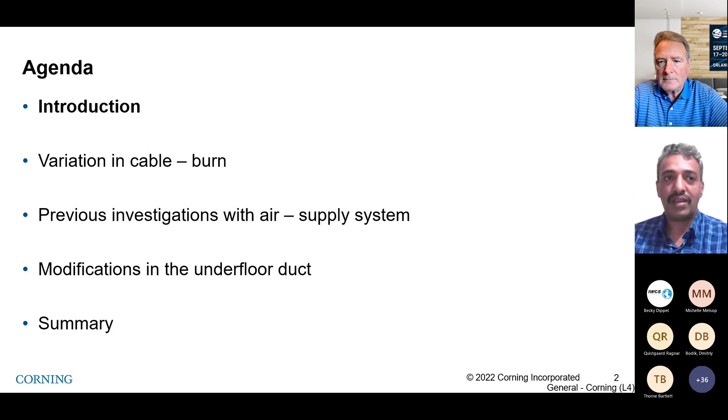The regulations provide common technical language to assess performance of construction products. It ensures reliable information is available to customers on the performance of the products so that customers can make informed choices when they buy these products. So the idea of CPR is to provide reliable information to customers so that they can make informed choices.

One of the very important pieces of information that people need to know before they can buy construction products is the fire survivability of the products. And this particular test is about fire survivability of cables when they are installed in the construction environment. So all the cables which need permanent installation in the EU region must be classified as part of this test.

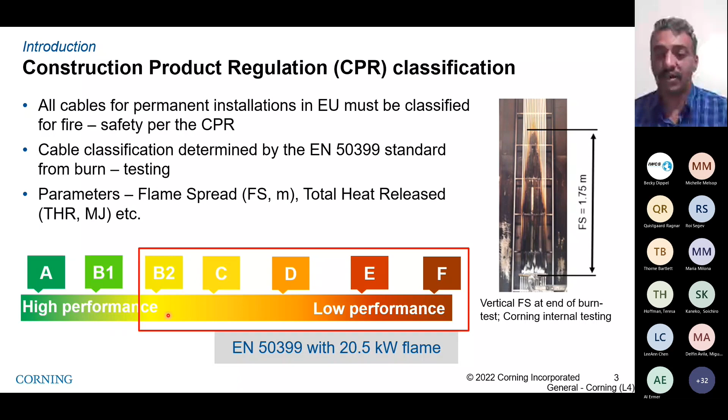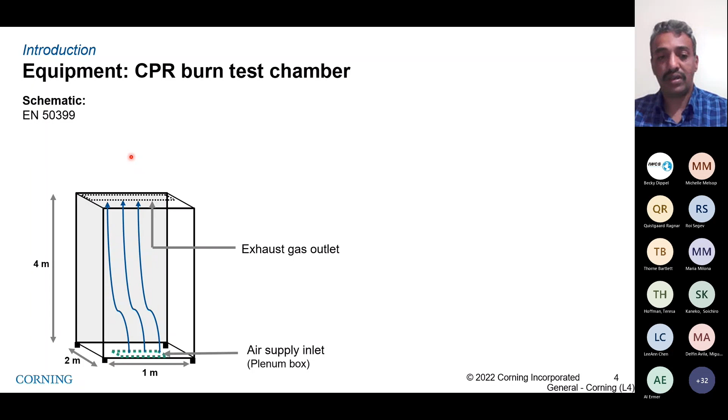So here I have a small schematic. It doesn't show all the details of the test chamber used for testing cable burn performance, but it shows the key features. We have a sort of quadrilateral shaped test chamber, and it has two openings - one inlet on the bottom side for air to come in, and one outlet on the top side through which the combustion products can go out from this chamber.

All the combustion products that go out from the test chamber are collected and sampled. In this sampling tube, this is where they measure the heat release rate, smoke production rate, and all of the key parameters.

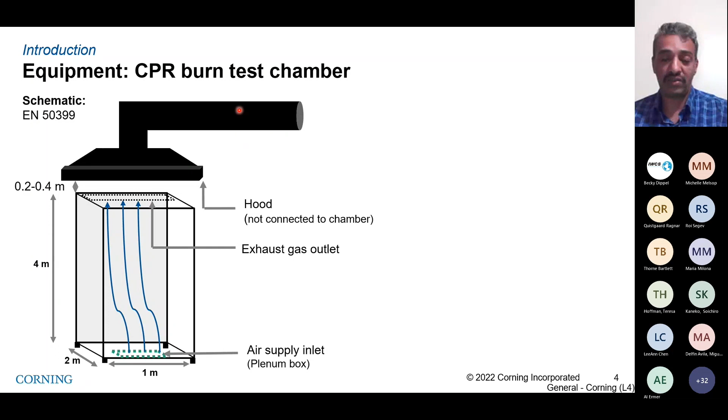The cables are typically mounted on a metallic ladder. It is usually made up of steel, and depending on the size of the cable, they are either bunched together in a few numbers, or mounted one single adjoining to each other.

The test itself starts with starting the flame, the burner. Fire is provided by the burner, placed somewhere here, and this burner creates a flat flame which impinges on these cables. Once you initiate the fire, it is supposed to propagate along the cable length vertically upwards. Based on the cable's performance, it will propagate a large distance or a small distance, and that will decide the classification of the cable.

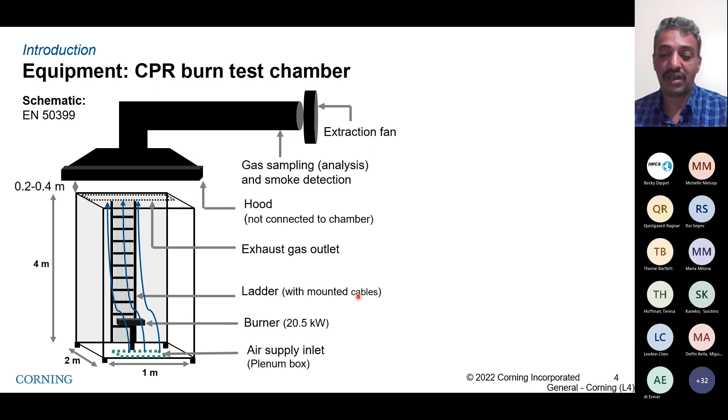So in this particular work, we are more focused on the air supply that comes out from the bottom, from the floor of the test chamber. This outlet is connected to a set of tubings which supply the compressed air through these tubing systems, and then at the end of this, it comes inside the chamber.

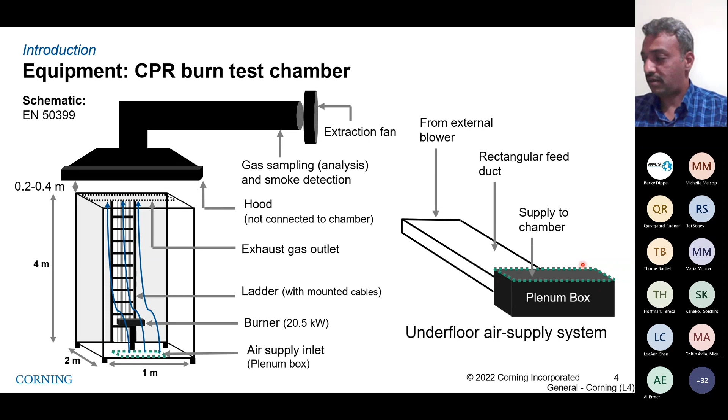Now I'm going to talk a bit about why we are testing, why we are studying this particular test. The topic of the next part is variation in cable burn performance. This is the main problem we are trying to solve. There are various labs across Europe which do this test and can give classification to the cables, and manufacturers are supposed to reach out to these labs for getting their cables classified. We also in-house have a lab, a burn test chamber in Berlin.

What we have found is that the test results are not reproducible across the labs. So if you do this particular test in one lab multiple times, you will get similar results. But if you do this test across many labs, then the results are not similar.

So the test is reproducible at one lab, but not replicated across the other labs. So that is the main problem.

And we wanted to see the difference between each of these labs - what is the difference in the test procedures that they adopt, or what is the difference between the test chambers that they have. So to do that, Corning, as one of the leading optical fiber and cable manufacturers,

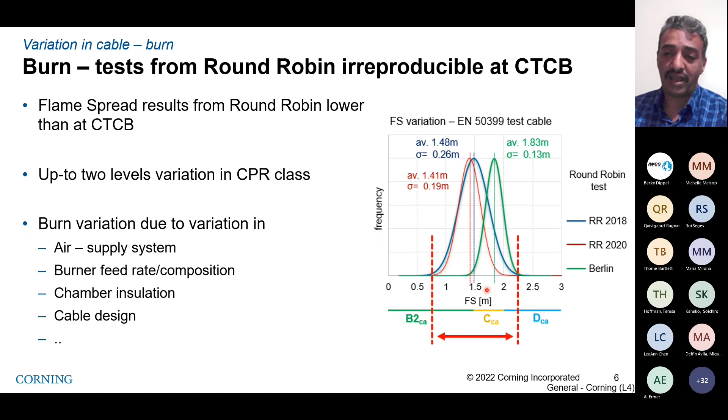So there were a lot of studies done in the past. I'm not going to go in detail of all of those studies, but you can find a lot of that information available on previous IWCS presentations.

So I briefly talked about the reference cable that Corning took an initiative to build. This particular reference cable has a flame retarding jacket material on the outside, a PE element in the center of it, and then the GRP element, strengthening element at the core of it.

So this particular cable was provided to all the labs across Europe to test. And then it was easier to compare because we had provided the same cable across the labs.

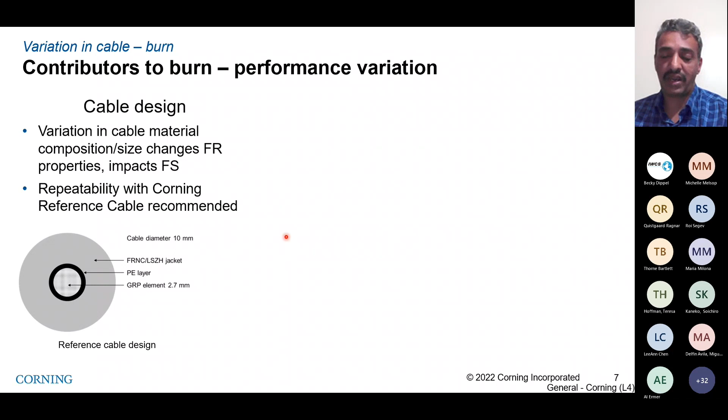I mentioned about the previous studies that were done, and one of those studies was related to burner feed rate. The burner feed rate study was done to verify the input, verify that the fuel input can be accurately measured by the devices that we have installed on the test chamber. So it was very consistently verified across a very long duration of time.

As part of this round robin study, we also found that it was difficult to test the flame or compare the flames that are produced by each of these burners. So a wooden blackboard was used to compare the flame structure across these labs, the flames produced by each of these labs,

and then based on the outcome of this whole study, it was decided that anything that falls within this region is acceptable, and there was a wide range of flames that were accepted, and certain criteria were devised about the flame. And we want to do something similar for the air supply system as well.

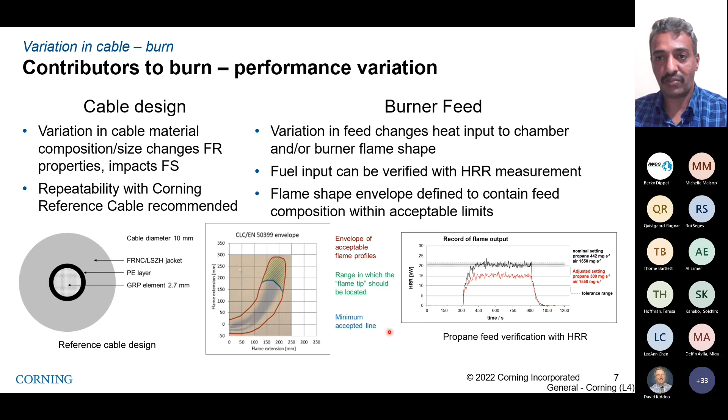I'm now going to talk about one of the previous studies that was done on air supply system. In the 68th IWCS conference, me along with some of my colleagues presented a study on a hypothetical scenario where we

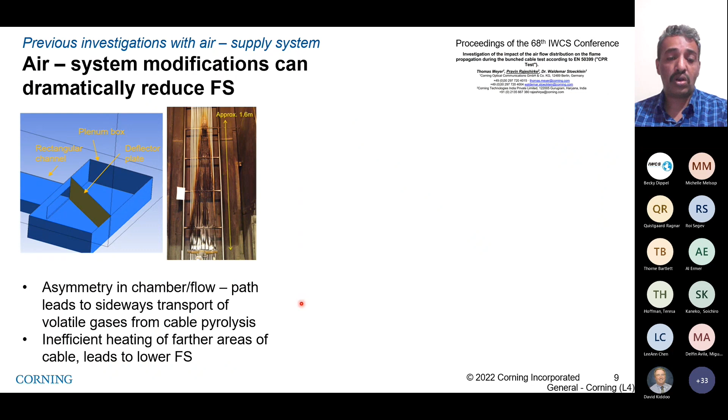modified the air supply system by putting in a kind of deflector shown here, and this created asymmetric flow, asymmetric air supply inside the system. At the end of this study, we found that this asymmetric flow pattern leads to lower flame spread. This led us to further explore this air supply system to understand exactly how that impacts the flame spread.

Then in the later studies, what we did is we closed half the portion of the plenum, or the plenum box.

In one experiment, we covered the plenum towards the door side, and in another experiment, towards the cable side. What we found is that when we covered the plenum towards the door side, the flame spread was drastically reduced from 1.9 meters down to 1.6 meters. This is large enough to make changes in the classification of the cable, so this was a significant impact.

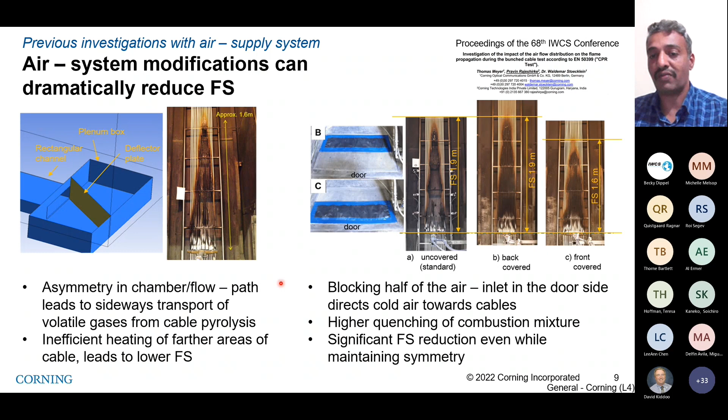Both of these changes were very easy to spot if you look at the chamber. So if someone modifies the chamber according to these suggestions, it was easier to spot and anyone could figure it out. This gave us more understanding that there may be other things hidden inside the plenum box which create similar flow patterns, and at the end of the experiments we might end up getting smaller flame spread. But we wouldn't know that the reason for smaller flame spread is the air supply system and not the cable design itself, which is what we really want to test. So that was the motivation.

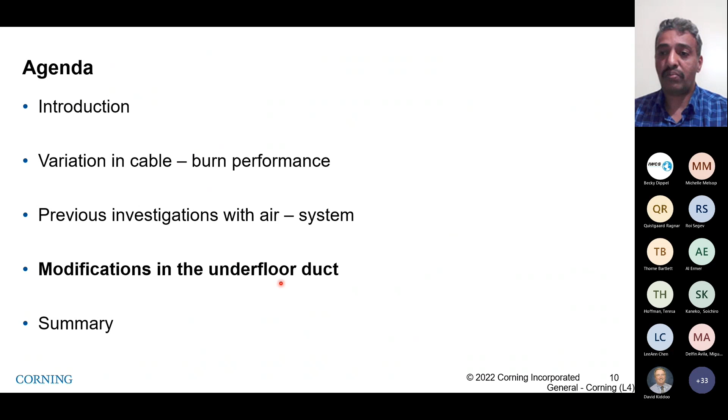So we looked at if we do changes inside the supply lines and make an airflow pattern similar to what we saw in the previous slide, we might end up getting reduced flame spread. That was the main motivation, to see if things modified here can result in lower flame spread. The rationale behind this test is to check the design of the cables for reducing the flame spread rate - it should not be impacted by the test chamber design. So this is one of the things we wanted to study.

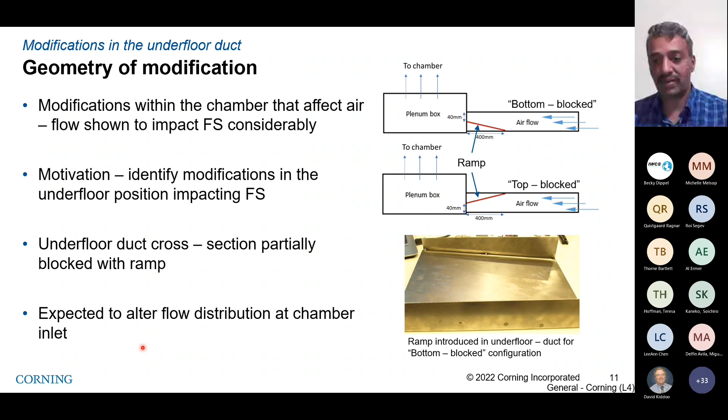Then we identified these modifications in the underfloor and its impact on the flame spread. We expected that at the end of this test we would alter the flow distribution in the chamber, and that would ultimately impact the flame spread. Let's see some of the results we got.

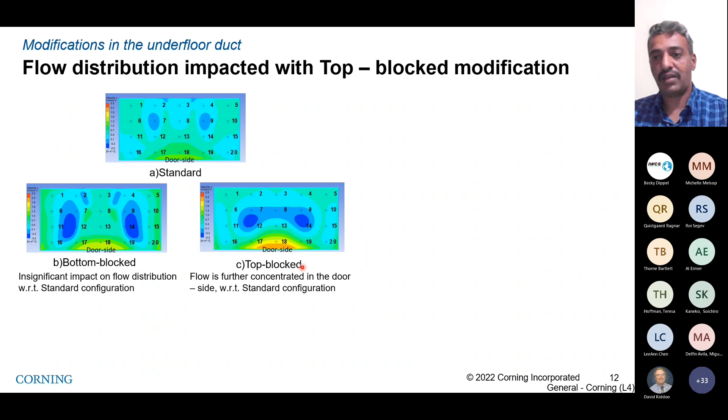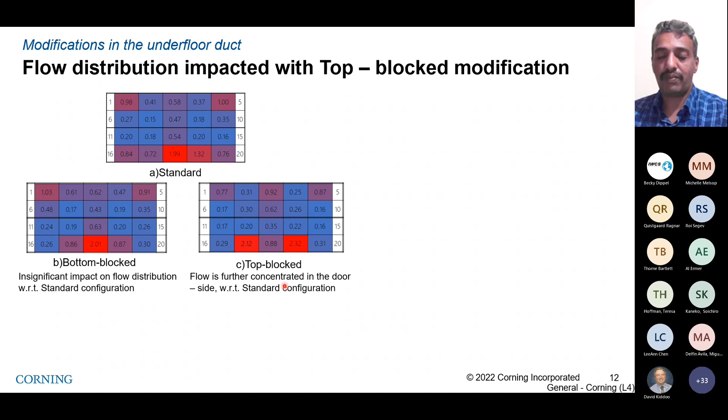This was also verified through experiments. We experimentally found out that the top blocked case was more impacted by the changes in velocity than the other two cases.

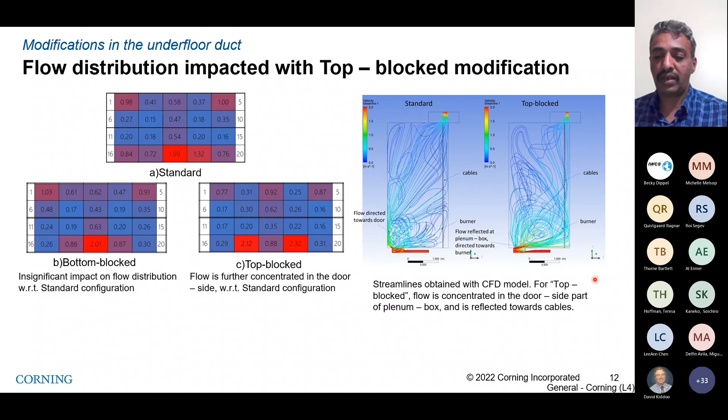That doesn't happen for the standard flow setup. And even if you block the bottom side, it doesn't create this kind of pattern, because the flow can travel from the top portion opening, and then again it will create a similar flow pattern, and you end up getting similar flame spread. So that was the main factor deciding the flame spread.

Here I have some experimental evidence to support the hypothesis explained in the previous slide. For standard air supply, we get a flame spread close to 1.9 meters or so, and with the bottom blocked supply we again end up getting a similar kind of flame spread. But with the top blocked system, we end up significantly reducing the flame spread - reduced by about 0.4 meters, which is large enough to influence the classification of the cable.

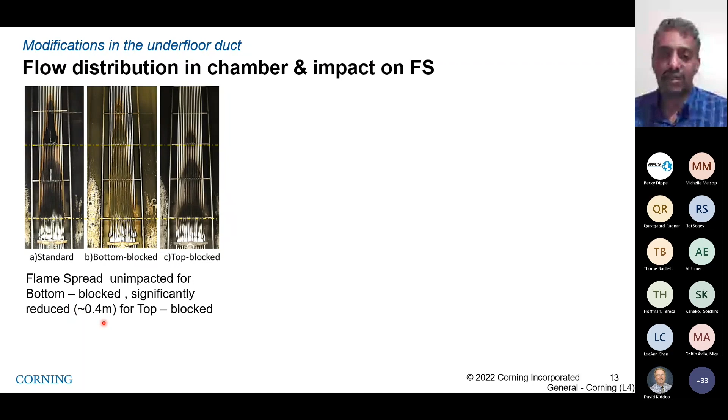We also measured how the air supply system in the chamber gets affected by measuring the exact velocities at different locations. I'm just showing 3 of these measurement points, and we can clearly see that for standard, all the flow goes towards the door, creating high velocities near the door, about close to 1.34 meters per second. Then at locations 2 and 3, with 3 close to the burner, we end up getting reduced velocity.

But for the top block case, the airflow near the door has lower velocity, 0.4 against 1.34, but near the burner, or towards the burner, we get slightly higher velocities. So more air is supplied towards the burner directly rather than traveling along the door.

So this is the main mechanism which reduces the flame spread, and this is something we should avoid, because we want to test the cable's performance, not the test chamber's performance. So any modifications done underneath the chamber are going to affect the cable burn performance. So the standard document needs to be modified to avoid such scenarios.

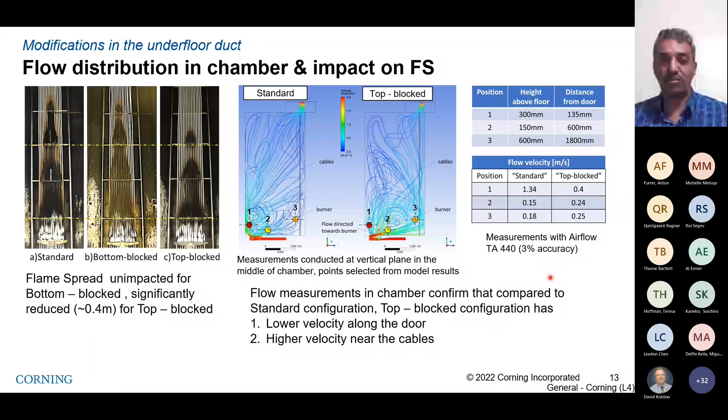To summarize, the flame spread results from round robin tests done across the EU labs showed lower flame spread than CTCB. CTCB is the lab in Berlin, Corning's lab in Berlin. And this impacted the cable CPR classification. The air system was found as a critical factor in the past, and further investigation of this air supply system shows that...

In this particular work, we did further modifications to the underfloor air supply duct and studied this. This underfloor duct modification can significantly impact and reduce the flame spread. Not only the flame spread, but also heat release rate and the smoke production rate along with it. However, this modification is in violation of the standard and should be avoided. Variation in the air supply can be identified experimentally, and that was also done as part of the study.

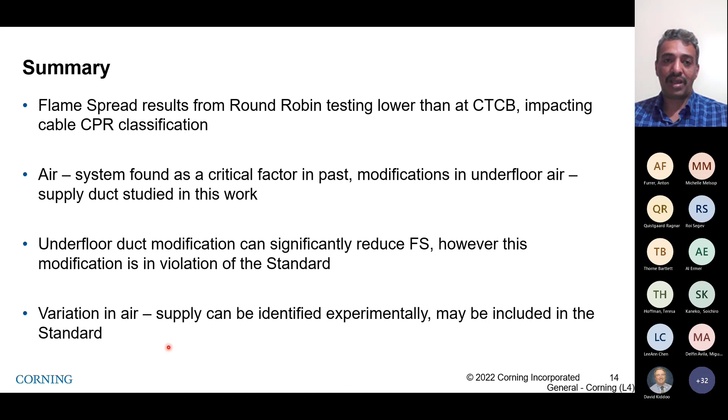All right, so that was mostly it from my side. These are some of my collaborators who have done a lot to help me do experiments and also do technical discussion across the last few years. So I would like to thank them, and thank you for your attention. I'm open for any questions if you have any.

Pravin, thank you very much. Extremely informative and very helpful. The fire safety performance of different cable designs is essential in network applications, building applications. So this is very valuable information.

Most of your testing, and this particular test, is a vertical test. I was curious to hear of the underfloor scenario evaluation. You even, in fact, use the term plenum chamber as far as configuration is concerned, which raised the question: while the plenum test, the horizontal plenum test, the NFPA 262, has higher airflow and higher fuel content to the flame, do you see any correlation capabilities? Have you even evaluated the same parameters so that we can begin to find a correlation between 50399 and the horizontal plenum test?

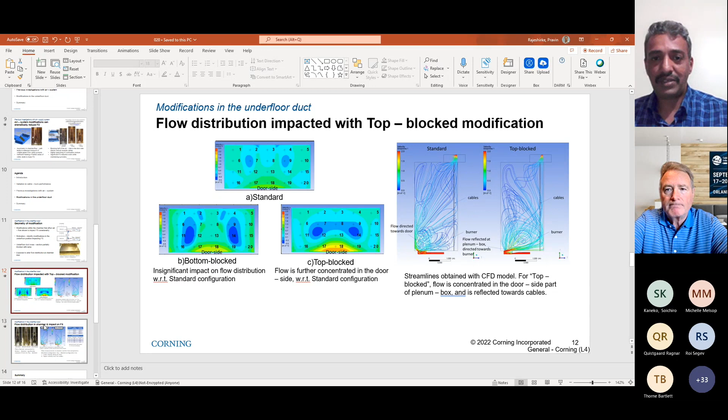Regarding flame shape, whether it remains symmetric or gets asymmetrically inclined: yes, the flame shape remains symmetric, but it is reduced drastically. For example, in the standard and bottom blocked cases, we end up getting flame spread close to 1.9 meters, while for the top blocked case, the flame spread is reduced to 1.5 meters, so it's a 0.4 meter reduction.

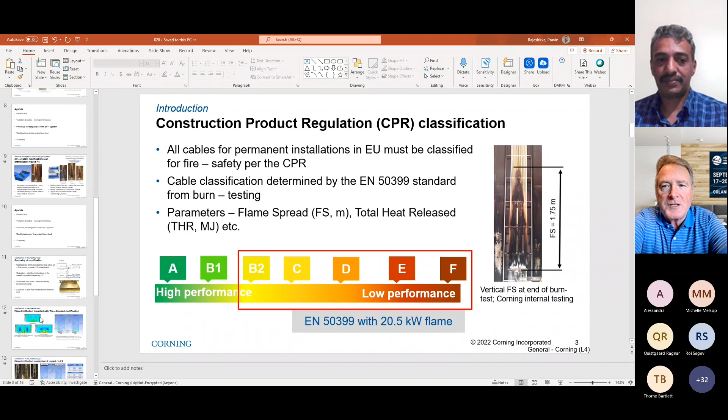Following up on the original question, a few more in the same vein: the CSA FT4 or UL 1666 riser test in North America, and the IEEE 1202 flame test, all being vertical and of similar configuration, airflow and fuel to the fire. Do these tests really compare? Is there some sort of correlation? Obviously we would like to understand, as we design cables and materials, how to have some consistency. Have you seen any correlations to the other vertical tests in CSA, UL, or IEEE?

Most of the cables that perform well in one standard, for example EN50399, do well in other standards as well. So there is definitely a correlation, and the tests are a bit similar. There are differences, but physics-wise they are more the same than different, so we do see a relation between them. The thumb rule is that if the cable design does well in one test, it should do well in the other tests as well, across the other regions.

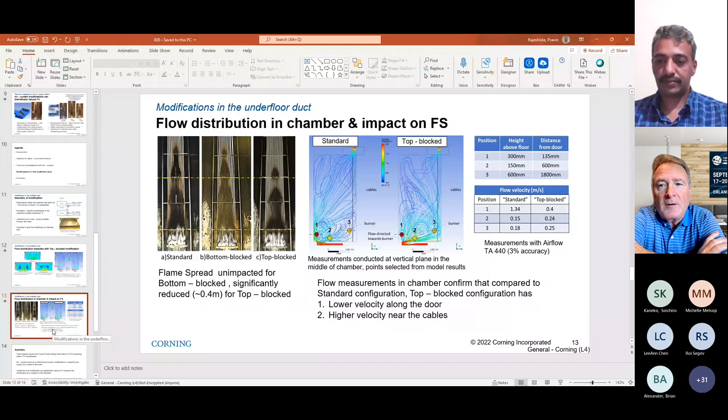That's always a question - the test is very sensitive, so consistency is critical to get the same modeling and evaluation of the cables. Did you happen to check the flame shape when changing the plenum airflow each time, and according to the new standard, would this be an indication of any problems?

I understand that in the new standard there is going to be some modification in the way the flame shape and flame sizes are produced. I have not seen the new draft yet, but I think two or three years back there was a round robin study across the labs to check the flame shapes, and it was observed that there was a lot of variation in the burner flames. It was decided at that time that there was a need to quantify the flame in some way, at least shape-wise, and have that included in the standard document. So I think some of the things I've listed here are now going to be part of the document - again, dimensional and flow consistencies are critical in any flame performance testing, so all labs will have to recognize that for consistency.

Is there any effect of air temperature, and was that considered? Yes, we did study the effect of atmospheric conditions, air temperature as well as humidity in the air, but we have found that those do not affect it a lot. Obviously, if you have higher atmospheric or air temperature, you end up getting a slightly larger flame spread, but statistically it is insignificant, so air temperature does not play a role.